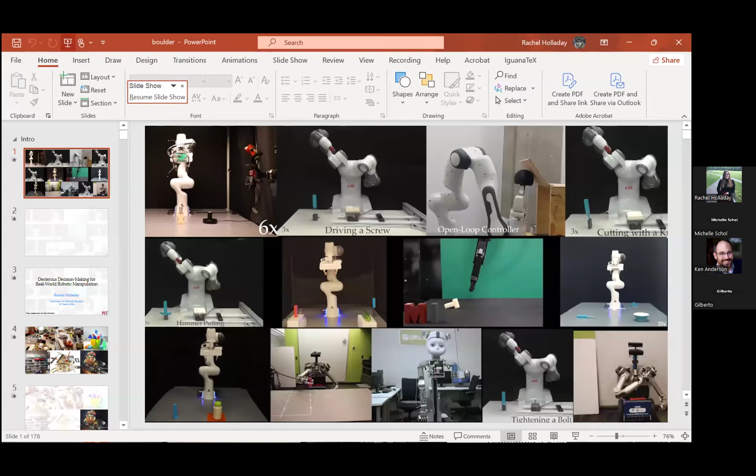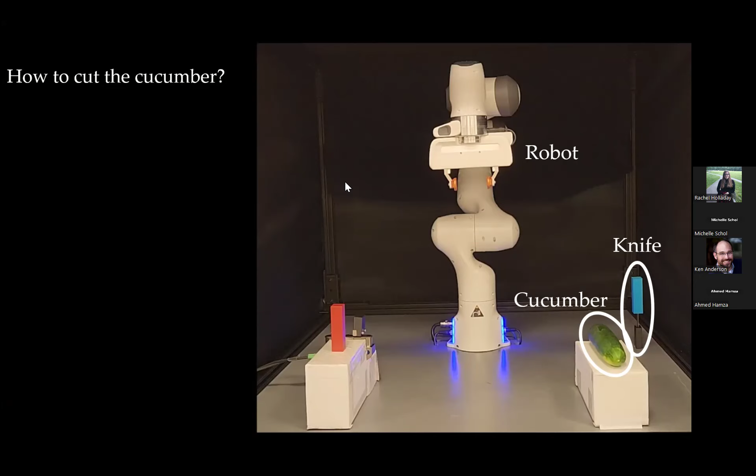So we might think about what it takes for a robot to accomplish this task. I'm going to hide my Zoom—hopefully I don't regret that. Thinking about what it takes to get a robot to accomplish this task, I'm going to frame this as: first the robot has to solve for what is the sequence of actions, or rather the game plan or strategy, that it needs to accomplish this task.

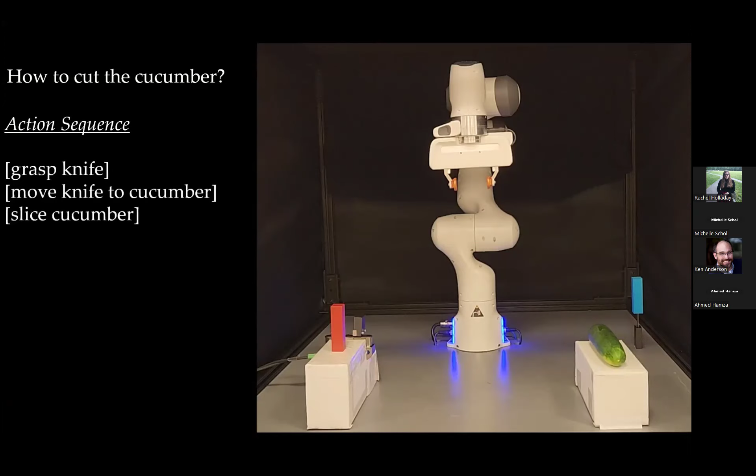If we're chopping up a cucumber, or cutting a cucumber, then a valid initial strategy might be that we'll ask the robot to grasp the knife, move the knife to the cucumber, and slice it.

Now, for the robot to actually execute this in the real world, it has to solve for the discrete and continuous action parameters for each of these actions. So for example, if we want to grasp the knife, we have to solve for how we grasp the knife in a way that we can actually reach and use to slice the cucumber.

How do we move our robot's arm to that grasp position without colliding with anything? If we're thinking about slicing a cucumber, we can think about what forces we need the robot to exert and what arm motions achieve those forces. And this is just a small subset of the things the robot needs to solve for.

As I mentioned, many of these parameters are continuous—there are a continuous number of ways you could grasp an object or trajectories that move through the world. But given this, what we can ask is: is this a viable strategy for the robot to accomplish the task? Could it find a satisfying set of parameters and actually accomplish the task in this environment?

I'm going to lead the witness slightly and say that in this case it would not succeed, because if we go to cut the cucumber, nothing is holding it in place and it's likely to roll around. Not only is that maybe a low-key dangerous, we're unlikely to succeed at the task. So in this case, I'm going to declare this a failure, and our robot needs to find a new strategy to accomplish the task, namely one that holds the cucumber in place.

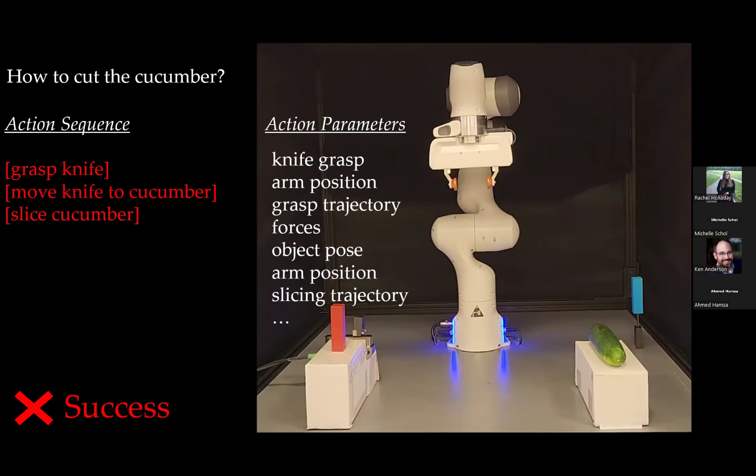This is a particularly odd kitchen where we have a vise, so we could secure the cucumber with the vise—you don't know what my kitchen is like, this could be valid. So you can imagine the robot's action sequence could now be: grasp the cucumber, place the cucumber in the vise, close the vise, then grasp the knife, move the knife to the cucumber, and slice the cucumber.

And like before, there are a lot of action parameters that we have to solve for. In addition to the ones I mentioned before, how do we grasp the cucumber? How do we move the cucumber to the vise? Where do we place the cucumber within the vise?

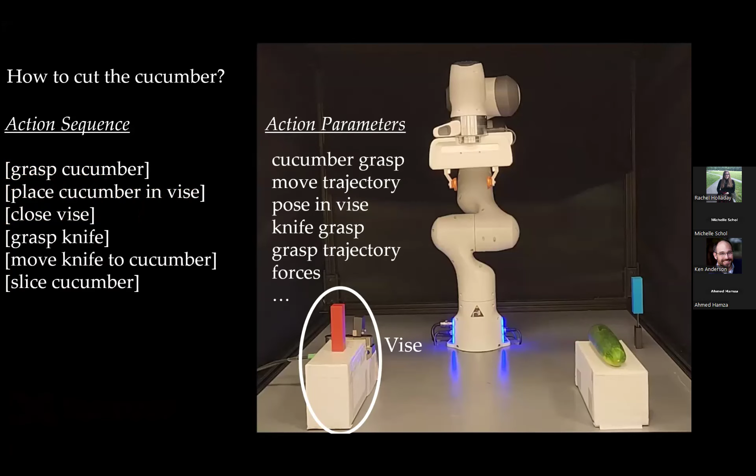But given all this in this new strategy, we can ask that same question from before: is this going to succeed in this environment? Well, there's this red object sitting on top of the vise. It's kind of taking up space and blocking the cucumber. And what this means concretely is that there does not exist a collision-free pose for the cucumber within the vise. So again, this strategy would not succeed.

So the robot has to come up with a new strategy. Let's say it now decides it's going to grasp the red block and move it anywhere, as long as it's out of the way. And once it's done that, it can continue with the strategy from before. Now, again, I ask the same question: will this succeed?

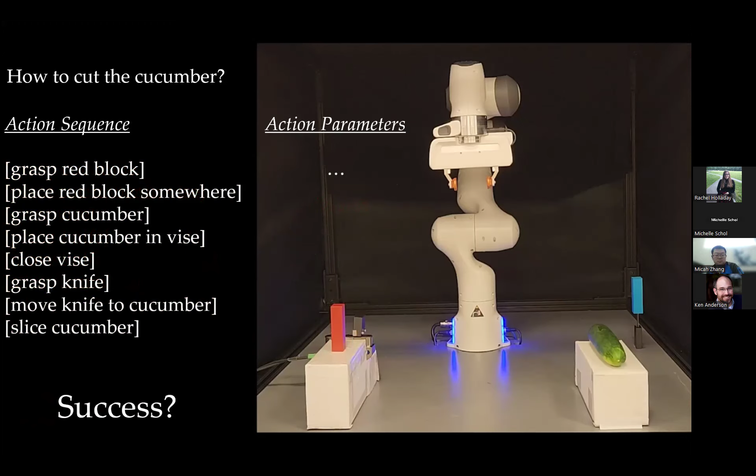As fun as this game is, I'm only going to play it for so long. So in this case, yes, the robot can plan and execute a series of motions. It's first going to move that red object out of the way. Once it's done that, it can go over and grasp the cucumber and place it within the vise.

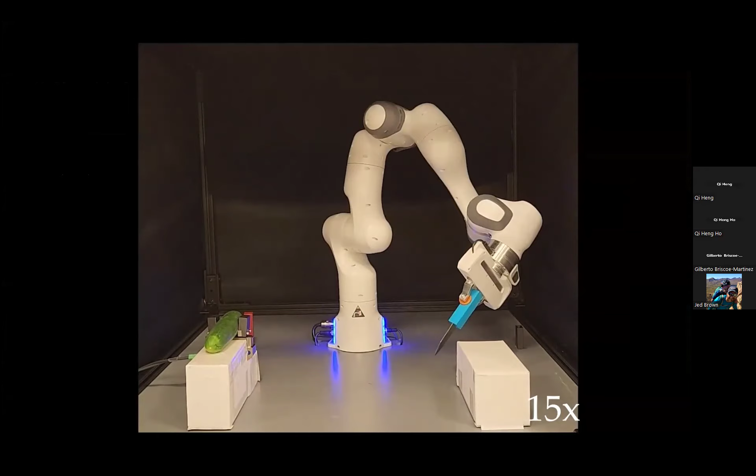Planning for the vise is part of the system, so it's the robot's responsibility. And once it's done that, it can go grasp the knife. Oh, this gets people - it is a real knife. We're not doing toys, I intend to actually cook. That sometimes scares people, but okay, given that, good job robot.

We were able to slice the cucumber. And I frame that as the robot was solving for a sequence of actions and the parameters of those actions. And those two influenced each other and were also influenced by constraints in the environment.

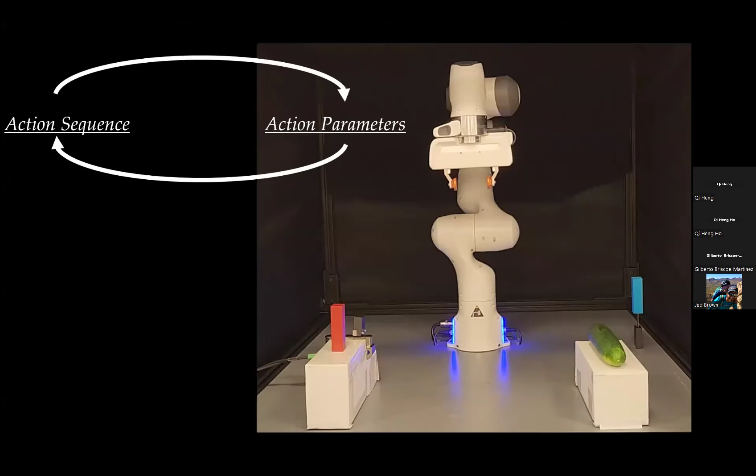Now, I'm really happy that my robot was able to solve this task in this environment. But I want my robot to be able to solve many tasks in many different environments. And so what I really want is for my robot's behavior to be able to generalize. And I would argue, in order to get to this generalization, our robot has to do some type of reasoning like we did, in the sense that it has to reason over this hybrid combinatorial decision space.

Where there are constraints based off the task and the environment. I want to tell my robot what to do, I don't want to tell it how to do it. If I had to specify to my robot exactly what it had to do in each environment, that would get pretty laborious. And in a similar vein, if we took a strategy like behavior cloning, that would struggle to aggressively generalize in the way that I want my robots to.

So because I have this motivation for generalization, the majority of this, we're going to take a model-based approach. It'll be the robot's responsibility to reason over its constraints, given models of its task and environment. Now, those models could come from engineering mechanics and be analytical, or they could be data-driven and learned. All of the above works as long as it fits within a framework that composes.

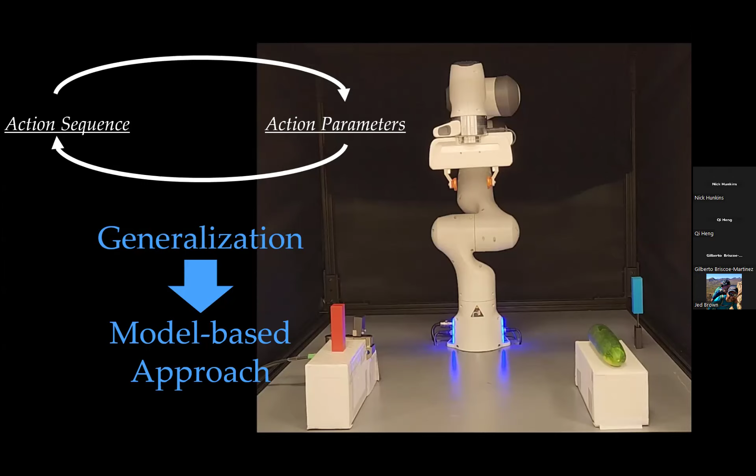Now, this idea of solving a combinatorial hybrid decision-making problem for my robot, taking a model-based approach, fits within this category of task and motion planning, or TAMP. Now, my colleagues and I wrote a survey paper a few years back, and while there's been a lot of lovely work in task and motion planning, the overwhelming majority, with one limited exception, has been focused on enabling robots to reason over constraints relating to geometry.

Let me hide this. And what I mean by that is that the robot is checking constraints like: is that motion collision free? Is that object reachable? Is that placement free? Now, this is still a very hard problem. If you have lots of objects, or you're operating on a long horizon, or you're dealing with cluttered spaces, it's still a hard problem to solve for.

We saw how that red object in the way forced us to change our plan. But I would argue that this is fundamentally limiting if the only thing we're reasoning over is geometry. This is why, if you have any familiarity with task and motion planning, you may associate it with just pick and place tasks.

If we think back to the tasks that I started the talk off with, accomplishing these tasks requires the robot to reason over constraints relating to both geometry and physics. The fact that we were exerting force through the knife forced us to relocate our object to somewhere secure. Likewise, if you had a robot rolling out dough, dynamically swinging a hammer, or packing and deforming supplies, all of these would impact the robot's decision-making. This is why my research focuses on proposing models and algorithms that enable reasoning over geometry and physics to accomplish long-horizon robot manipulation tasks.

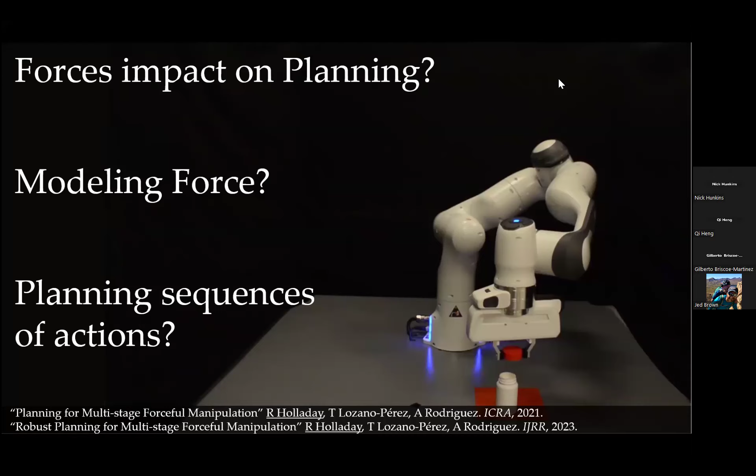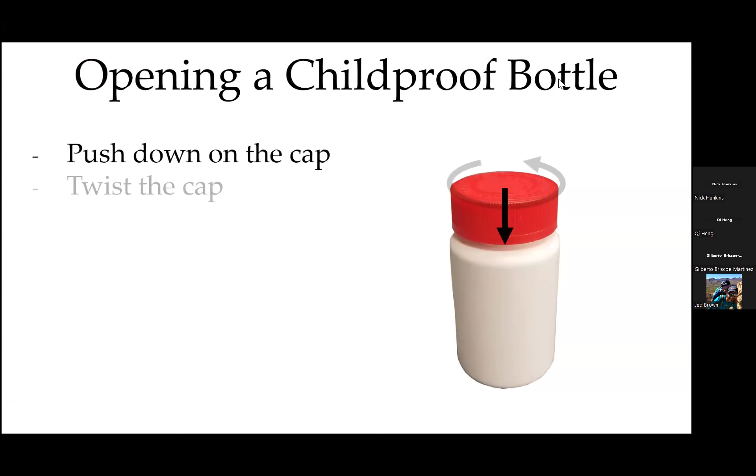The example task we'll use throughout this part of the talk is asking a robot to open a childproof push-twist medicine bottle. To open it, the robot has to both push down on the cap and twist. If we put a frame on there, we can think of it as exerting a downward force and a torque about Z.

For now, we're going to assume these quantities are given. Later on in the talk, we'll relax that assumption. Think about the robot accomplishing this task.

Here's a quick video. The robot exerts this push-twist action, and then once it's done that, it can open the cap.

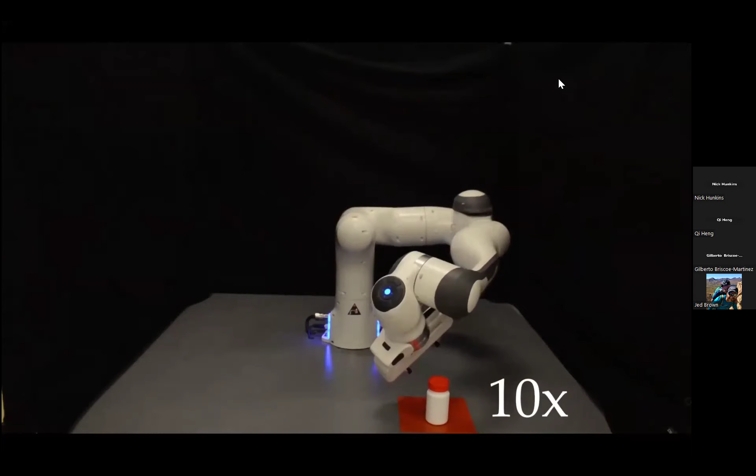I have no robot to do that for my bottle today. Sad. Okay, so the robot was exerting a force and torque while it was doing that push-twist action.

I'm going to argue that the need to exert a force and torque, or a wrench, impacts the robot's decision-making in two ways.

The first way we already saw in the cucumber cutting example: if we're exerting a force and torque on an object, we have to hold it still. For example, here, if nothing is holding the bottle still, then it's going to move with respect to the table. It actually slips, and we're not able to successfully complete the task.

The reason why that didn't happen in the first video I showed you is that the bottle is actually on a red mat that has a high friction coefficient, and this provides enough grip to hold the bottle in place. So the system, whether it be the environment, the device, or another robot, needs to hold, secure, or fixture the object in place.

The second constraint on our planning is that the robot has to be strong enough to accomplish the task. Now what do I mean by this? To answer it, we're going to do a slight technical dive.

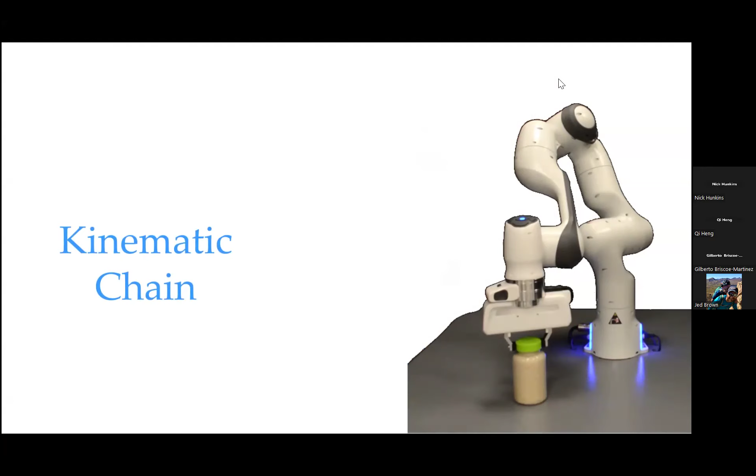I think of the entire system, the robot, the bottle, the table, as a kinematic chain composed of a series of joints. Some of those joints are robot joints, and some are what I'll call frictional joints formed via contact, for example the robot's grasp on the bottle.

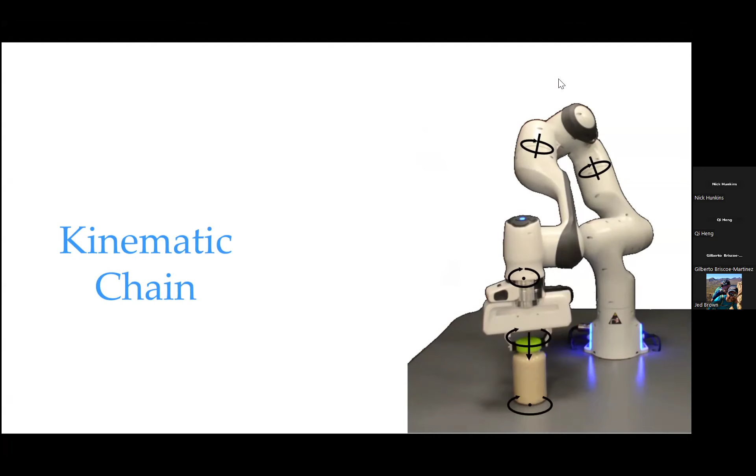The constraint that needs to be true in order for us to plan, for the robot to be strong enough, is that in the face of the exerted force and torque, each of the joints needs to be able to resist that force and torque, each needs to be able to be held or stable. So we're going to mathematically model the amount of force and torque each joint can resist, and we'll say if it can resist it, colloquially that the joint is stable.

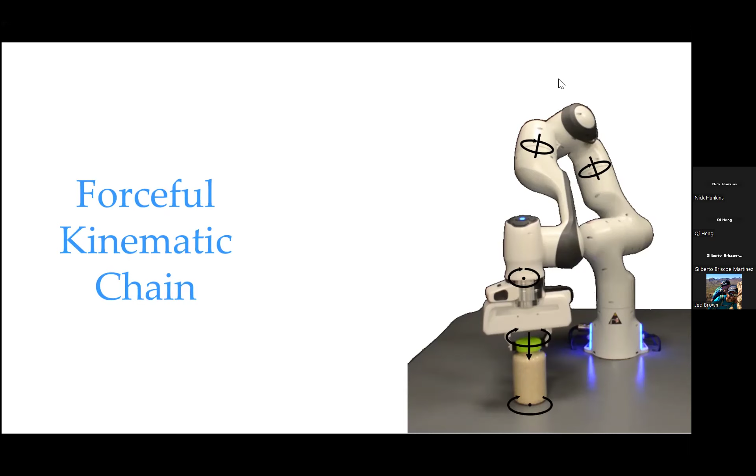And if all of our joints are stable, we'll say that our chain is stable and our constraint is satisfied. So we're going to start off with the more straightforward case, which is thinking about what does it mean for a robot joint to be strong enough?

Well, robots are limited in the amount of torque they can exert. They have torque limits. Breaking this joint would correspond to hitting a torque fault, which is a very sad noise we want to avoid. So we want to model, are we within the robot's torque limits?

So what we're going to do is take the exerted force torque wrench, rigid body transformation into the frame of the hand. And then once it's in the frame of the hand, we have to transform it into torques at the joint. Now, in order to do this transformation, we're going to use what's called the manipulator Jacobian.

So you take the forward kinematics of a robot and differentiate it with respect to time. You get the manipulator Jacobian. It maps joint velocities to end effector velocities, and beautifully, the transpose of the Jacobian, which is what we have here, maps wrenches, or force and torque, at the end effector to torques of the joint, which is exactly what we're looking for.

I'll note the manipulator Jacobian is parameterized by our joint angles, our configuration Q. And intuitively, that makes sense. If you think about your own robot arms, different configurations might allow you to resist more or less force, and our configuration dependent Jacobian is capturing that.

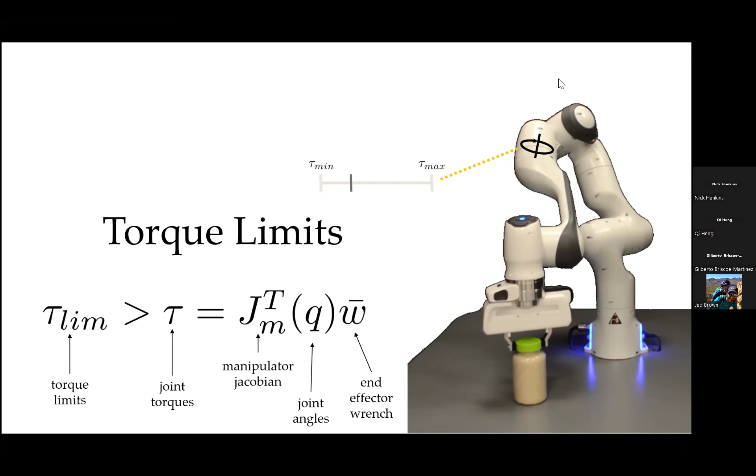So once we have transformed into torques at the joint, we can compare that to our robot's torque limits, which we assume are known. And if we're within our robot's torque limits, then our constraint is satisfied, and we can check this for all of our robot joints. So this is the more straightforward case, I'd argue.

We can also think about what does it mean for our frictional joints to be strong enough? Well, for our frictional joints to break, that means the two objects would move relative to each other. So our two frictional joints here are the robot's grasp on the bottle, as I already mentioned, and the bottle's contact with the table.

And so we saw a case where the joint between the bottle and the table broke when the bottle slid relative to the table. And so we want to express how much force and torque each of these frictional joints can resist. To model this, I'll observe that both of these joints are what's called planar joints.

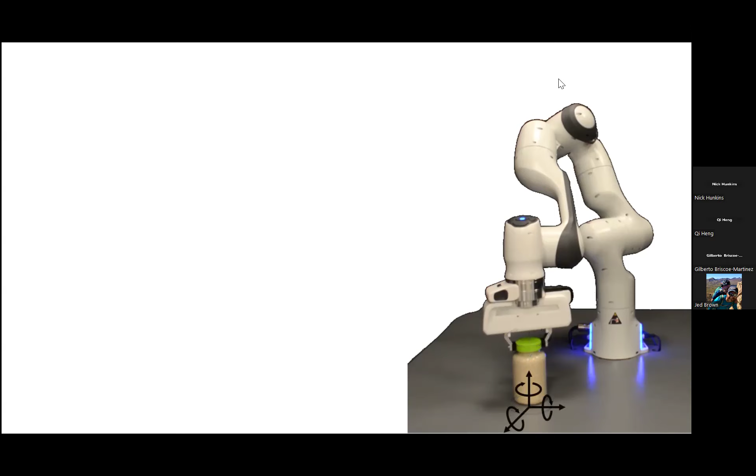And what I mean by that is if we look at, for example, the joint between the bottle and the table, in 3 dimensions, the object cannot move due to non-penetration limits. Because we are dealing with rigid bodies, the bottle cannot rotate into or go into the table.

And so we'll assume in these three directions that we can resist an infinite amount of force and torque due to non-penetration limits. In the other three dimensions, we can move, and in fact we've already seen a case where it did, and what prevents motion in these three dimensions is friction. So the question becomes, how much friction do we have for these types of joints?

Well, the amount of frictional support given by a contact is quantified by something called the limit surface. And because we're dealing with planar contact, there are two possible construction methods: the ellipsoidal approximation and the generalized friction cone. And which is appropriate depends on the type of contact that you're making.

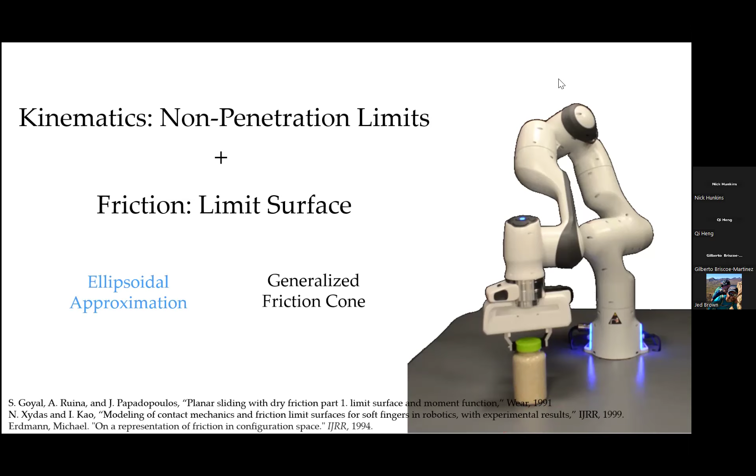Now, to understand the limit surface a little bit better, let's dive into the ellipsoidal approximation. So if you have a circular patch contact in a uniform pressure distribution, then the amount of frictional support given by a planar contact can be represented by an ellipse. And this ellipse is basically the set of frictional wrenches that this contact provides.

And so thinking about this a bit concretely, imagine this contact is experiencing an external force and torque, for example the wrench represented in green here. If that exerted wrench is within the boundary of the ellipsoid, then we can say we have enough frictional support to resist that exerted wrench, and our contact will not move. This is good for us because this means that our constraint is satisfied.

If we have an external wrench like the one given in red, where this exceeds the boundary of the ellipsoid, then we can say that our external wrench overpowers our frictional support and our objects are going to move relative to each other.

Now, how they move is actually well characterized, but we're not going to use that in this context. We're just going to say that it is bad because our constraint is broken.

This ellipse lives in 3D and it's parameterized by this matrix A. For isotropic friction, A has a few parameters: the grasping force N, the friction coefficient mu, the radius of contact R, and integration constant C. For now, we're going to assume that all of those quantities are known, but we're going to relax that assumption later on in the talk.

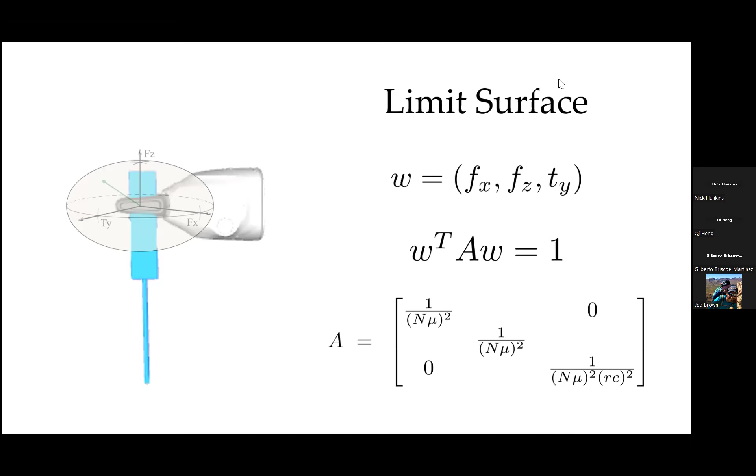Summarizing this, to evaluate a constraint with respect to the limit surface, do a rigid body transformation into the frame of the hand, and then evaluate whether that wrench falls within the boundary of the ellipsoid. And because different grasps lead to different rigid body transformations, one grasp may be stable when another is not.

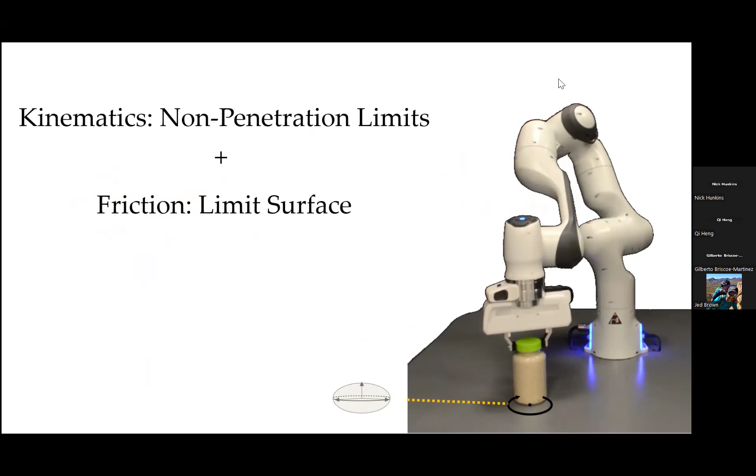And so in evaluating our planar joints, our frictional joints due to contact, we're going to use a combination of kinematics and friction. Bringing this all together, for each of our different joint types, we have a way of evaluating if the constraint is satisfied, if our joint is strong enough.

And you might have guessed, because we saw it before, that here our frictional joint between the bottle and the table is not satisfied. We can see that our models reflect that, in fact, that the exerted wrench exceeds the boundary of the limit surface.

In this case, what we'd want our robot to do is to find a new strategy that constructs a new kinematic chain with a different series of joints that are stable. Here, by using a high friction surface, that actually expands the boundary of the ellipse, and now we're stable.

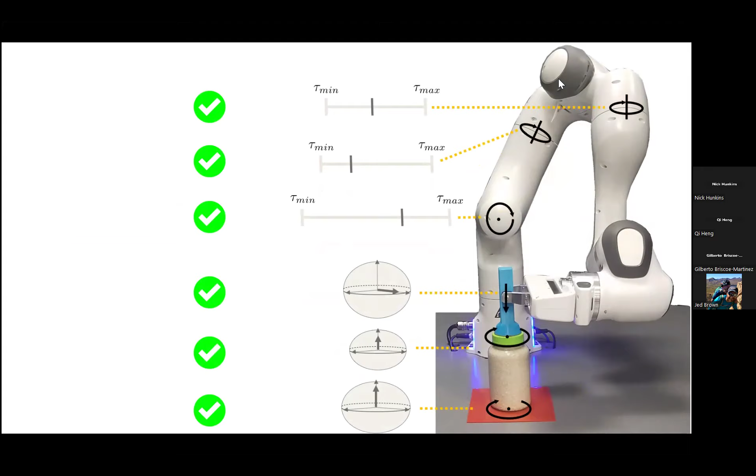Summarizing from this, we define what are the constraints that impact our robot's decision-making as a result of needing to exert force, and then we capture that within our forceful kinematic chain model. While I talked through a couple different joint types and a couple of different models, you can imagine swapping in different models and joint types. For example, there is a 6D version of the limit surface if you are so inclined.

Questions about this so far?

Why don't you press down? Is that also an option? The downward force, or are you looking just at the torques? Force and torque. So it's the downward force and the torque. And you couldn't press hard enough? Not in this case—the robot would not be strong enough to press down because, and this is a very specific answer, we're using Cartesian impedance control. For that robot, you cannot exert more than 20 newtons that way, and it would not be enough to make it stable. Okay, although it does sample for that to check.

Yes, if you have a strong enough robot, you can just power it through. Although we're not modeling whether you crack the bottle in half, which would maybe start to be a constraint. Great, other questions? Okay, we'll keep going.

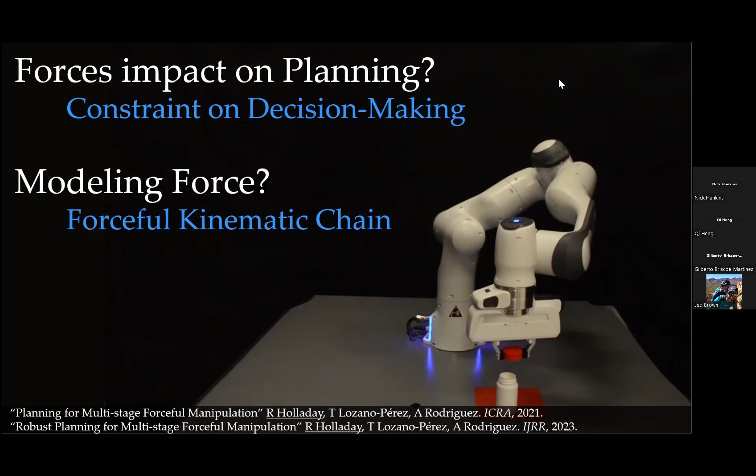So now let's think about how we can integrate this within the context of planning. To do that, I'm going to make concrete some of the things that I started the talk off with. The first of which is that I've been talking about planning sequences of actions. I didn't define what I meant by actions, and all of you were very polite—no one called me out on it, but I would like to define that now.

So when I say action, what I mean is a parameterized controller. We have some controller that we're executing on the robot, and it has parameters. For example, you can imagine we have a place action parameterized by things like the initial robot configuration, the placement pose, and the grasp. In this case, it runs a combination of a joint space controller and a grasp controller.

Now, given our controller, we're going to characterize our action by two things: preconditions and effects. Preconditions are the requirements, or what needs to be true about the state of the world, in order to execute your controller. For example, we might imagine a precondition to your place action is that wherever you're placing has to be available, has to be collision free.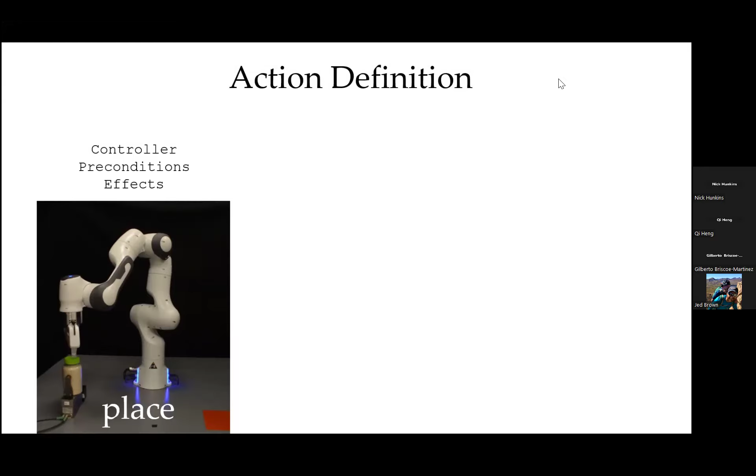And then we have effects, which are the resulting changes to the world as a result of running your controller. For example, an effect of executing the place action is that we're no longer grasping the object. This is given in PDDL, which is Planning Domain Description Language. Now, this is one action—we can imagine defining a whole set of actions.

Here's the move action, and here's one of the push twist actions. I want to call special attention to the push twist action because it exerts a force and a torque. So a precondition to executing this action is that the forceful kinematic chain constraint has to be satisfied throughout this action. That is how the constraint is integrated in: for any action that exerts force, the forceful kinematic chain constraint has to be satisfied as given in the precondition.

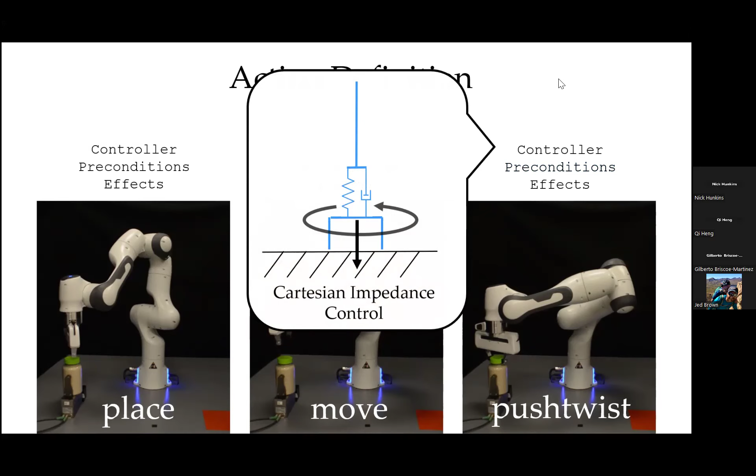I'll also note, although I already spoiled this, that in order to exert force we're going to use a Cartesian impedance control. I'm happy to talk about this more at length. But given this set of actions, returning to the beginning of the talk, our planning problem is that we need to solve for a sequence of actions and the parameters of those actions, subject to constraints. Those constraints relate to both force and motion and are encoded in our actions' preconditions and effects.

The way we're going to solve this, as I've kind of hinted throughout, is that we're going to use a task and motion planning framework. Specifically, I'm going to talk through the one that we use. It's state of the art, and I think it also gives a good example for how these types of problems are solved in general. It's called PDDLStream. So in order to use this framework, you have to specify a series of what's called streams. That is where the name comes from.

Streams are just functions, and they can serve two roles. First, they can generate possible instantiations of your action parameters. Because many of our parameters are continuous, you can think of these as samplers. For example, you could have a function that, given an object, samples possible grasps or possible forces. You can also have streams that sample more complex things, like ones that sample possible trajectories using collision-free motion planners, or a stream that samples possible impedance parameters.

In addition to generating possible instantiations of our action parameters, streams can also evaluate constraints on your parameters. For example, we have streams that check our forceful kinematic chain constraint, and streams that check whether a trajectory is collision free. These are functions, and within them you implement them however you like—you can use analytical models, learned models, or a combination of it all.

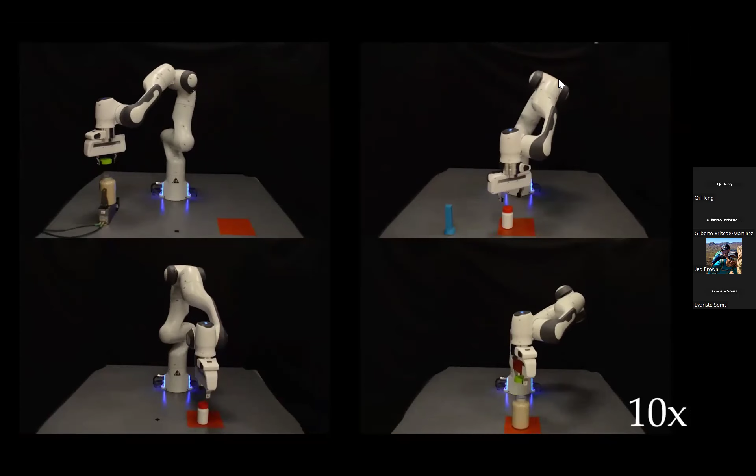Here we have different bottles with different force requirements, different objects, different locations. In each case, the planner is solving for, given this environment, what strategy can I use to solve the task? Sometimes it uses a vice, sometimes a tool, sometimes it has to relocate an object to a higher friction area because there's no vice or second robot on the scene, and sometimes it uses the robot's palm. To me, this is critical: my robot has to do this kind of decision-making in order to generalize to many different environments, reasoning about how to solve the task for that particular environment.

In addition to these tasks, we also deploy this in the context of twisting a nut on a bolt. I'll apologize, this is my only non-real robot video, because we did not have a 2-arm setup, but I want to highlight that this framework can handle this type of uncoordinated bimanual manipulation just as easily.

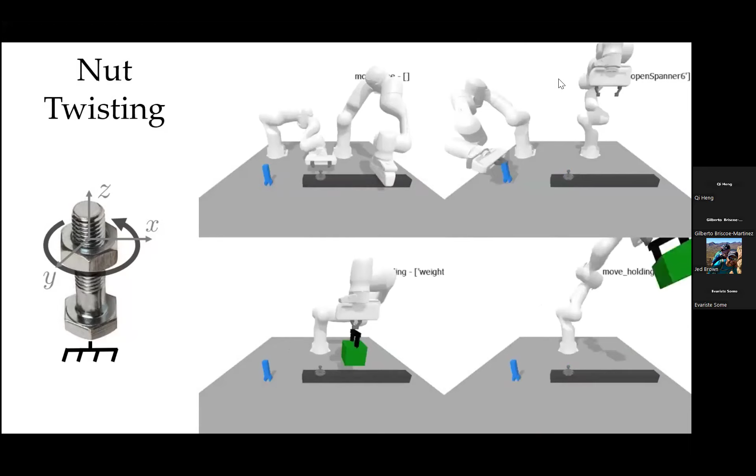So here we saw how we integrated those force constraints into the state-of-the-art task and motion planning frameworks. Are there any questions about this so far?

Does this framework is this framework limited to equipment, and how do you think you can address this problem if it is? Equipment in terms of specific to the embodiment of the robot? Yeah, like you said, some of them need 2 robot hands. Or maybe the movement of the robot hand is limited or something like that.

So it's not limited to different hardware. In fact, the last video I'll show at the end, we do consider a different robot hand, so that's not a limitation. It does require that you know what your robot hardware is, so that your planners have a notion of what your robot's capability is. But it's not inherently limited to different types of robots.

I have 2 questions that are sort of related. First, does PDDLStream do any sort of optimization? Does it see if—yes, if you wait 10 minutes, we will get there, because there is a notion of cost that we can handle. The second question is related: can you form an algebra from these actions, or is it just too complicated to do that?

That is a fascinating question. I do not know off the top of my head. It's not inherently clear that you could, because I don't think you could even adopt any of the proofs you might have from task planning, since now you have continuous elements that I assume would make everything ungodly messy. Do you at least know if there's commutativity—can you always do one action for the other, or the other way around? Does it work, or does that break down? I suspect that might be dependent on what your action set is, but I'd be hesitant to say it is, because the continuous elements might make things particularly messy and your constraints might not be universally satisfied. Apologies, I know this is an unsatisfying answer.

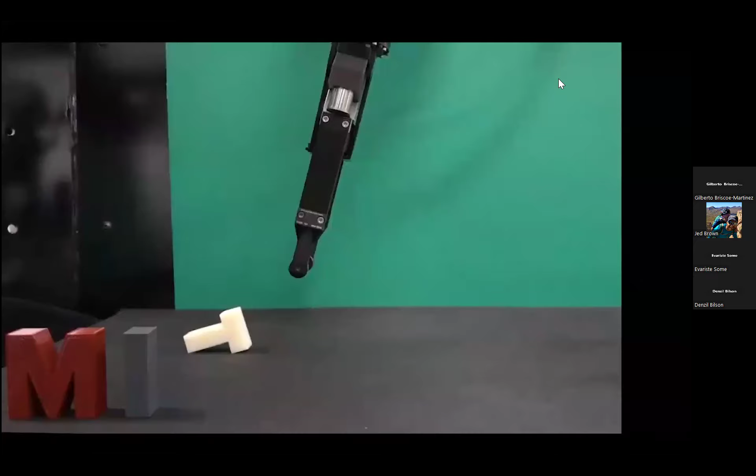So here I want to place this T-shaped object, and the set of initially available grasps, because of the environment, does not intersect with the set of grasps that allow me to accomplish the task.

Now, this is a somewhat contrived example, but I would argue the idea that you might have to change your grasp on an object comes up a lot. You can imagine if you're pulling a screwdriver out from a crowded tool bin, you might pull it out by the tip and then change to grasp the handle before you screw something.

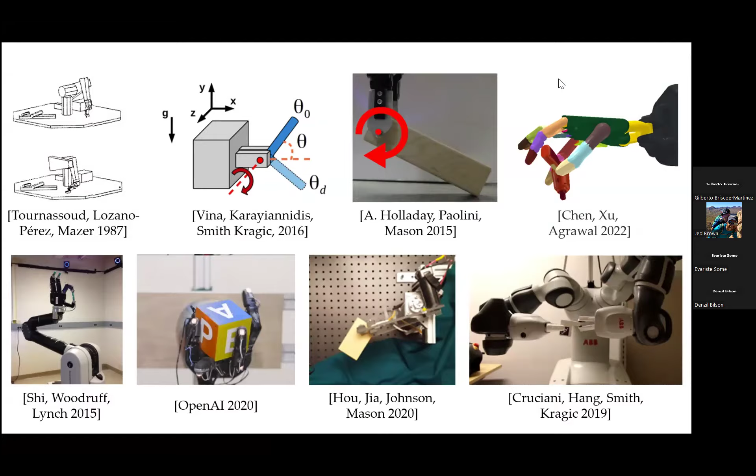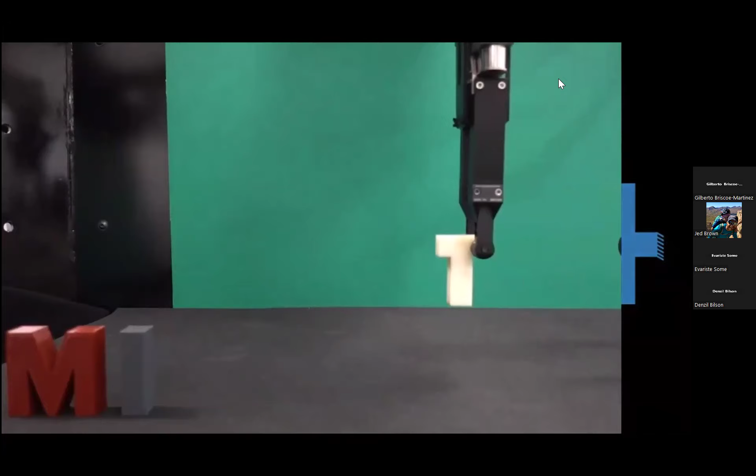The idea of robots needing to re-grasp or change their grasp on an object has come up a lot within robotics. There's a lot of really beautiful work. Today, I want to look at one particular way a robot could change its grasp on an object, and that is by enabling a robot to leverage its environment, specifically by pushing against features in the world. By planning a sequence of pushes, it can change how it's grasping an object, in this case, to spell out some funny words.

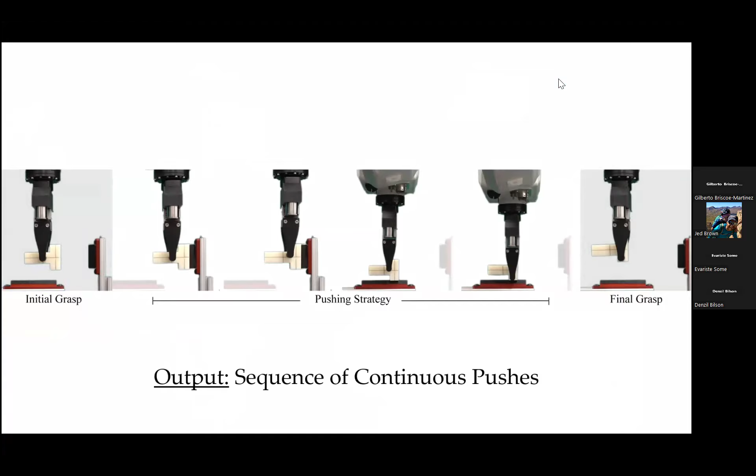So the planning problem it needs to solve is that given an initial grasp and a final grasp, and locations in the world where it can push against, the robot needs to solve for where and how to push in order to move from our initial grasp to our final grasp. The core constraint we need to solve for is, given a specific pusher, what is the set of motions that I can achieve?

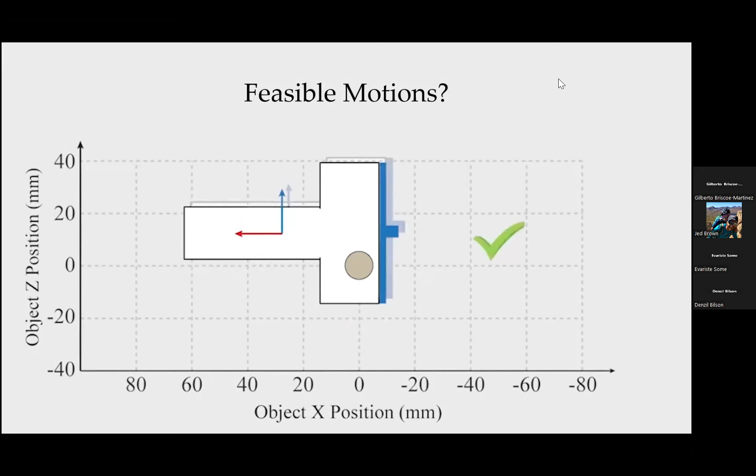Because pushing is underactuated, for a given pusher, there may be some motions that you can't achieve and some motions that you can. So what we want to characterize is, for a given pusher in the world, what is the set of motions that are possible?

Now, in 1986, my academic grandfather, Matthew Mason, defined the motion cone as the set of feasible motions that a rigid body can follow under the action of a frictional push. Great, this is exactly what I said we wanted. Did my grandfather cover it?

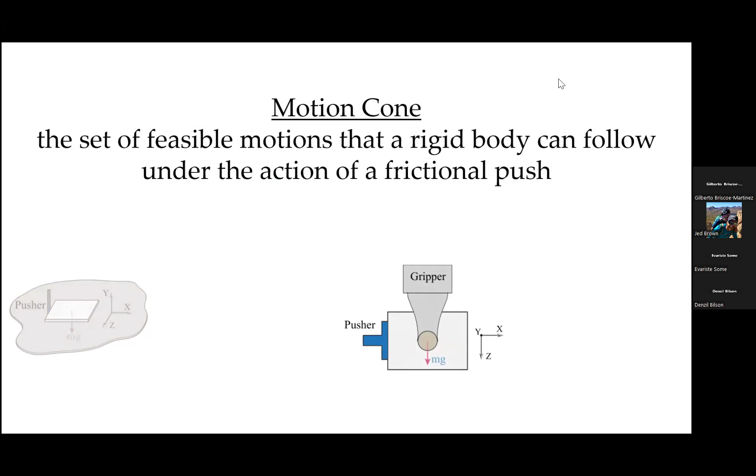Well, the motion cone was originally defined in the context of what's called horizontal pushing—you can imagine pushing an object on a table. But the video I showed, we were handling pushing in what's called the vertical plane, where what was supporting the object was not a table, but the robot's grasp. In addition to the force of the pusher, we also have the force due to gravity. The contribution of this line of work was to extend the notion and construction of the motion cone to consider a broader set of planar environments with different support surfaces and different forces acting on the object.

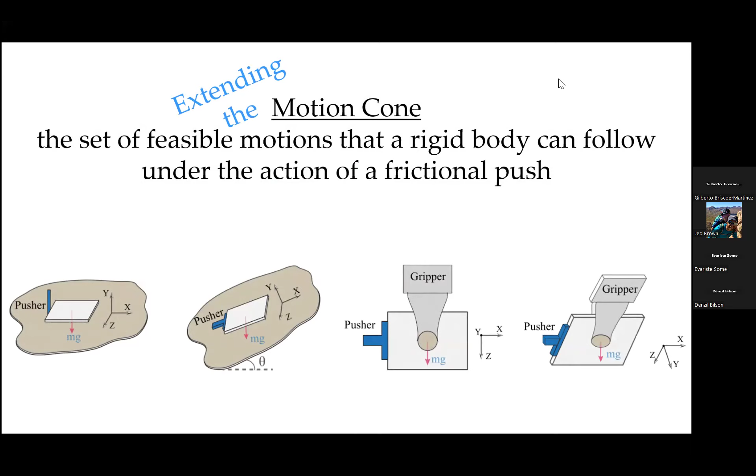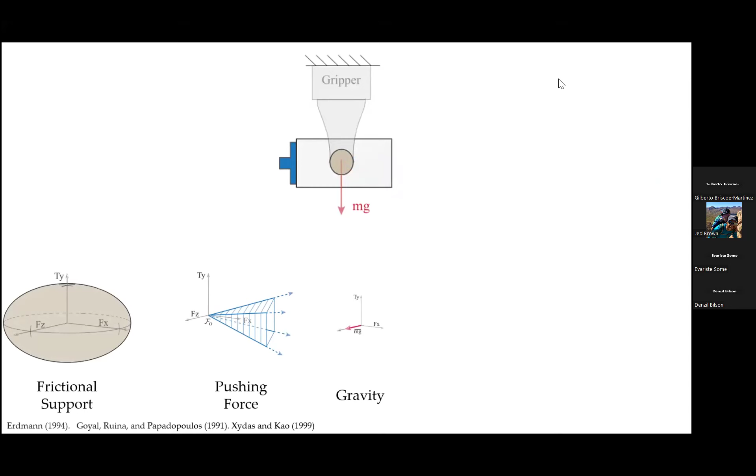Going over it very quickly, essentially we model what are the forces acting on the object. These are some of our old friends we've seen before, our limit surface, our generalized friction cone. We then combine and resolve these forces to get the set of possible forces, and then from that, the set of possible motions. That set of possible motions is our motion cone.

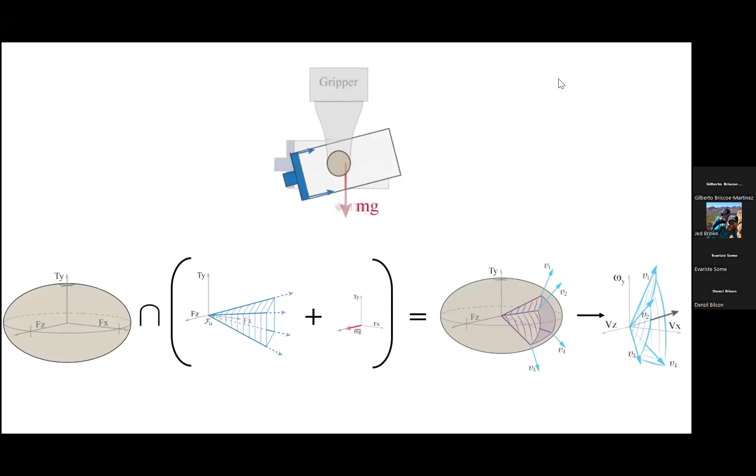So motion within this cone corresponds to a motion that we can achieve using our pusher. I won't get into the details, but we experimentally verified that this holds in practice with thousands and thousands of pushes in an instrumented setup.

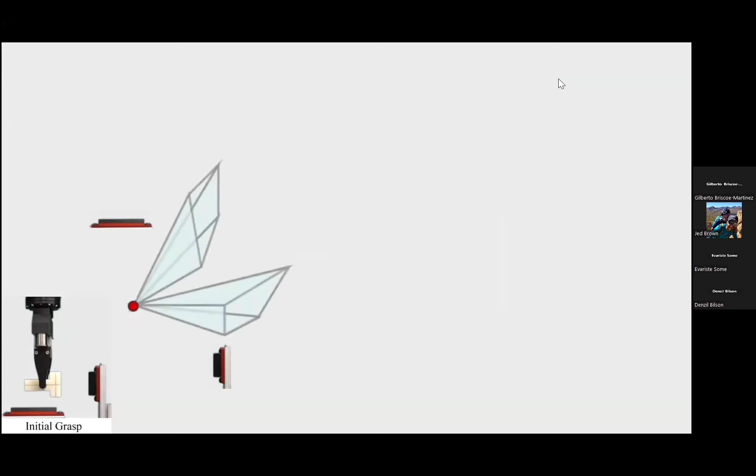But if we return back to our planning problem, what we can now say is that, given an initial grasp, if we have a set of pushers in the world, through our motion cone, each pusher defines a set of feasible motions. What we can basically do is explore our space by forward chaining these cones.

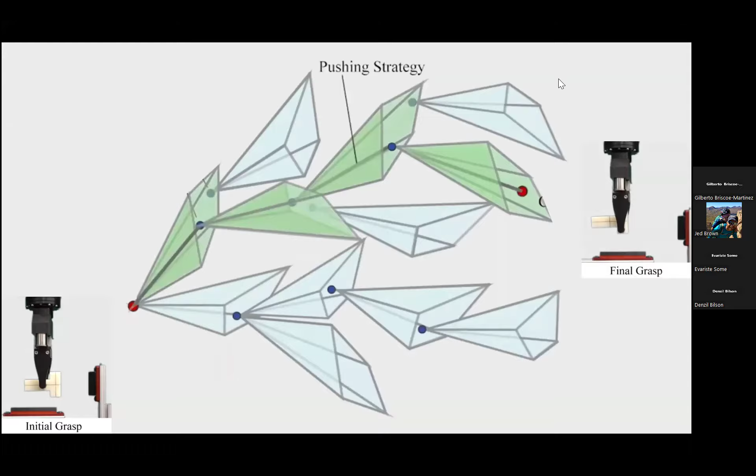We've taken all the difficulties and underactuation of friction in physics and captured it within this closed form set. Here we're using specifically a sample-based motion planner called RRT star. We can use it to find a sequence of pushes that move us from a start grasp to a final grasp. Now, return back to our video.

Here we can see that first the robot pushes just directly to the side. But if I now swap out for slippier fingers, the robot plans to first push down to account for the fact that as it pushes to the side, gravity is going to cause it to slip.

I'm putting the planning times in the corner here, and we're able to plan these sequences in fractions of a second. This is in contrast to a previous method that had to solve a complex inverse dynamics problem and took several seconds or even longer. We are able to handle non-convex objects, although we do assume that we know the object shape.

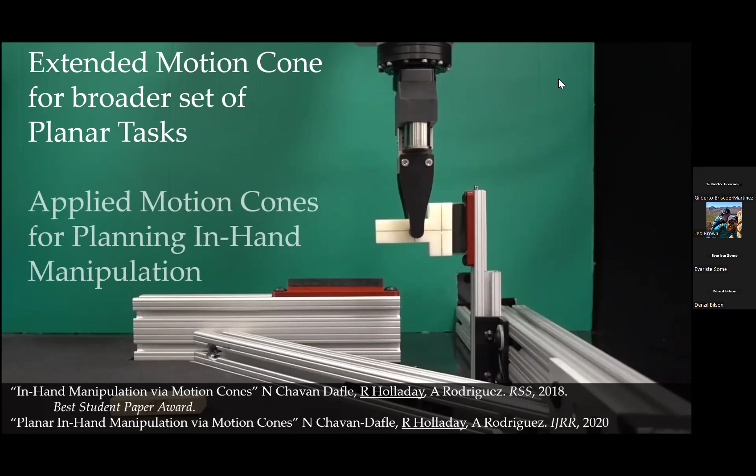So summarizing from this, we extended this fundamental notion of manipulation, the motion cone, to a broader set of planar tasks. The motion cone gives us a mapping of, given a pusher, a set of reachable motions, and we integrated this mapping into a sample-based motion planning framework in order to handle in-hand manipulation. If we think back to our stream conversation, this planner is yet another subplanner within our broader framework, expanding our robot's dexterity.

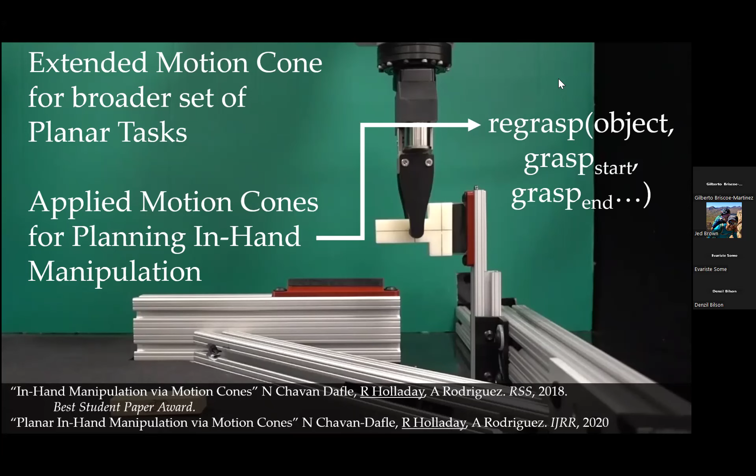So summarizing from this, we saw how we can model the impact of forces in planning and integrate that into our planning frameworks, both at the task and motion planning level. Throughout this, our robot has been solving for a variety of different constraints, and I want to think about how I can ask my robot to handle those constraints while balancing the fact that I want it to be robust in the face of uncertainty. This is also going to let us relax some of the assumptions I've highlighted throughout the talk.

In order to look at this, we're going to return to our cutting example. While there are a continuous number of ways to grasp the knife, for example's sake we're going to consider 3 possible grasps on the knife.

Given all of the modeling we just walked through, if we had a particular object that required a certain amount of force, we could evaluate if each of these grasps are suitable, if they're stable. You might think that if we have an object requiring a low amount of force, like a peeled banana, that each of these grasps are sufficient. And in fact they are - we're able to cut through the peeled banana using all 3.

But if we take an object that requires slightly more force, like an unpeeled banana, then the grasp that was only barely stable before - there's a lot of variation in bananas, let me tell you - might not succeed. The middle grasp can still cut through the banana, and the grasp on the far side, it's easy peasy banana squeeze. But if we take an object requiring even more force, like our friend the cucumber, these 2 grasps are not able to cut through it, but the grasp on the far side is able to. If you remember the very first video I showed you, this might have been a hint of what was to come.

Now, for each of these food and grasp combinations, I'm showing you 1 video, but for each condition we repeated this 10 to 15 times. On a personal level it was a really weird week for me - not to brag, but I've had multiple meals in a row prepared by a robot, just not one a doctor would approve of. So I have to keep going in my research.

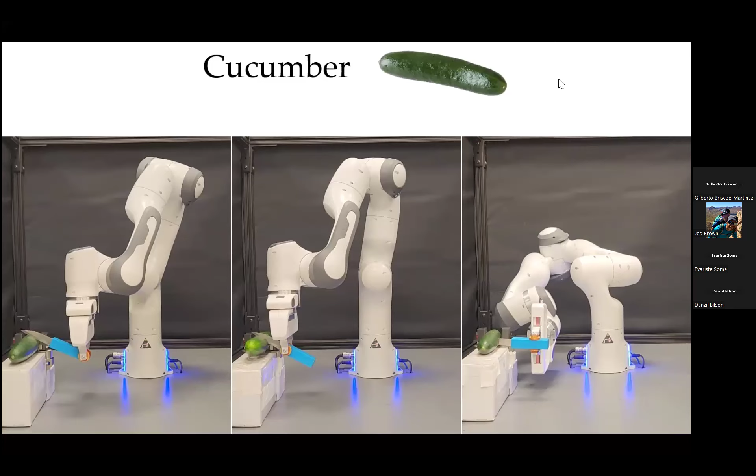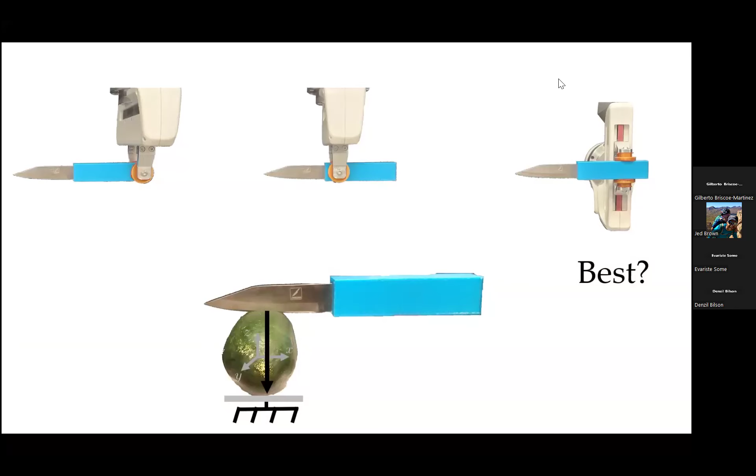But if you watched all the dozens and dozens of videos, and not me eating in the corner, you might conclude that this grasp on the far side is doing quite well, able to cut through the most number of objects. You might say this is the best grasp, we should just go with this one. And on a more fundamental level, if this is the best grasp, then what are we doing all this sampling and searching for? Shouldn't we just commit to this one? Not so fast - there's not one grasp to rule them all.

First, because we're considering what is the strongest grasp for just the downward motion of the cutting action specifically. But to that more fundamental point, we have to deal with constraints related to both physics and geometry. So being strong enough isn't sufficient.

And if you look at this grasp, because of the geometry of the hand, it's the Franka Emika hand, if anyone's familiar with it, it's quite fat. And you're only able to use this grasp without running into the table if your objects are elevated. That's why everything I've cut so far is on elevated cutting boards. Yes, I'm calling those cutting boards.

So you might imagine that in certain cases, depending on what you want to cut, you may want to make the trade-off of using this middle grasp that is strong enough, but maybe can get into a wider set of confined spaces. On the other hand, if you truly need to cut something that requires a lot of force, the robot would then need to plan a sequence of actions that relocates the object to an area where you do have enough clearance to use this stronger grasp.

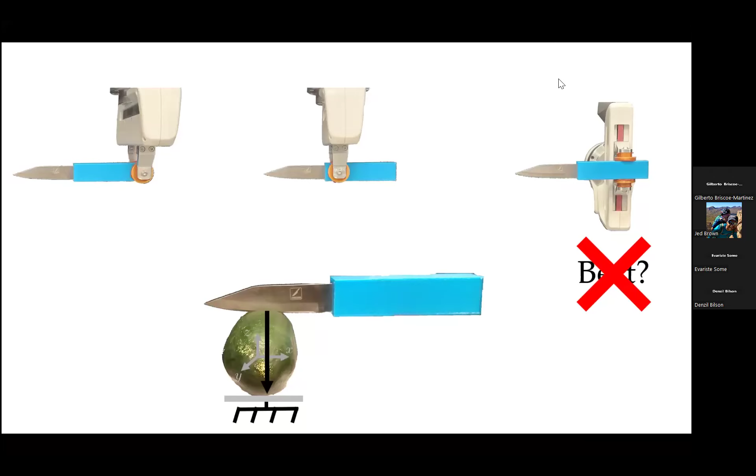And so I want my robots to be able to make these trade-offs, to think about how you can balance constraints while also being robust. And the way we're going to do that is we're going to frame robustness as a cost. This goes back to the optimization question.

So I'm going to take our forceful kinematic chain models, and for each of the physical parameters, I'm going to perturb them slightly - this is the amount of force that's required, the grasping area, the friction coefficient. We're going to perturb them. You can think of this as capturing a bounded amount of uncertainty. And across all of these perturbations, I'm going to count how many of them lead to the forceful kinematic chain constraint being satisfied, giving us a probability of stability given perturbations in our physical parameters.

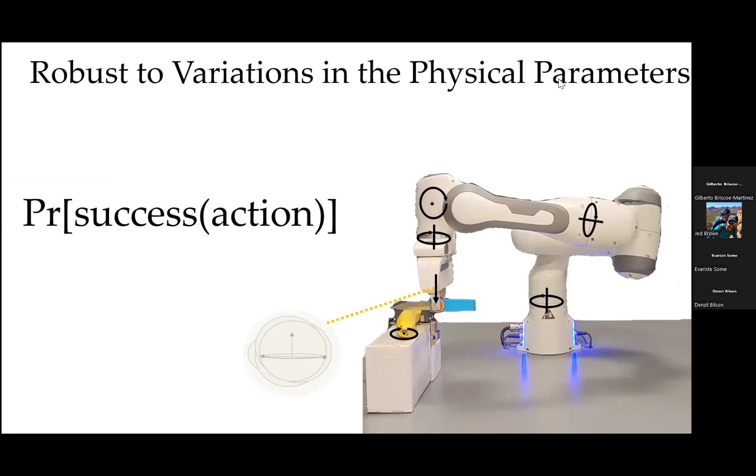And if I take the negative log of this, then minimizing this corresponds to maximizing plan success likelihood. What I can say is I can assign this notion of robustness as the cost of my action.

Within a framework like PDDLStream, we can use additive action costs, where the cost of a plan is the sum of the cost of an action. And then we can ask our planner to find a plan that is within some cost threshold. So you can think of this as being like how robust we want the plan to be.

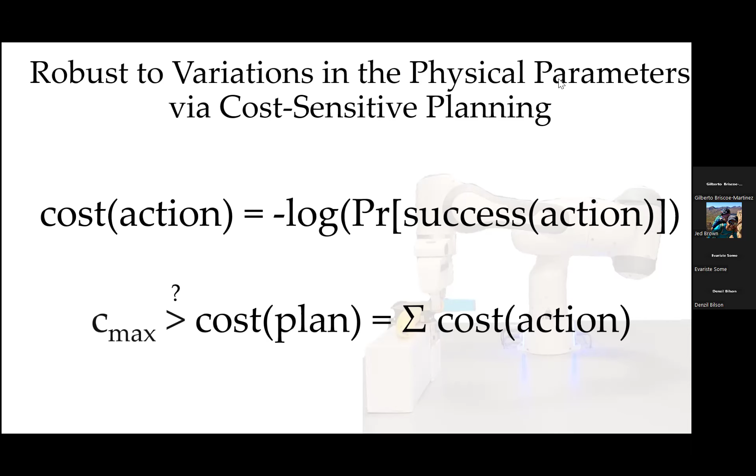So this is optimizing for a very specific thing, this notion of wanting to optimize for robustness. You can imagine optimizing for other quantities. But why I like this is that now it enables the robot to both balance all of those hard constraints while optimizing for what is the most robust choice in the given environment.

So again, I don't want to specify to my robot what it has to do. I want it to be able to do that reasoning. Now here we're talking about robustness as a way to handle uncertainty. It's certainly not the only way to handle uncertainty, and we'll get back to that idea in a few slides.

Questions about robustness so far?

Okay, so summarizing from this, here we thought about how we can enable robots to reason over geometry and physics for these long horizon manipulation tasks. And we specifically looked at reasoning over force and enabling robots to make robust decisions in the face of uncertainty.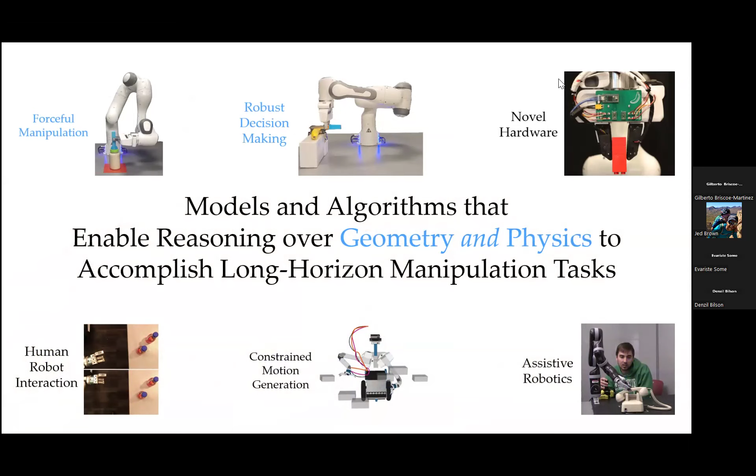To me, I think this sets the stage for the foundations of the work I want my group to look at in the future. And specifically, I want to talk through a couple directions that I think are necessary to push the field forward.

How are we doing on time?

Great. Okay, so I'm going to talk through a couple specific directions and throughout that raise research questions.

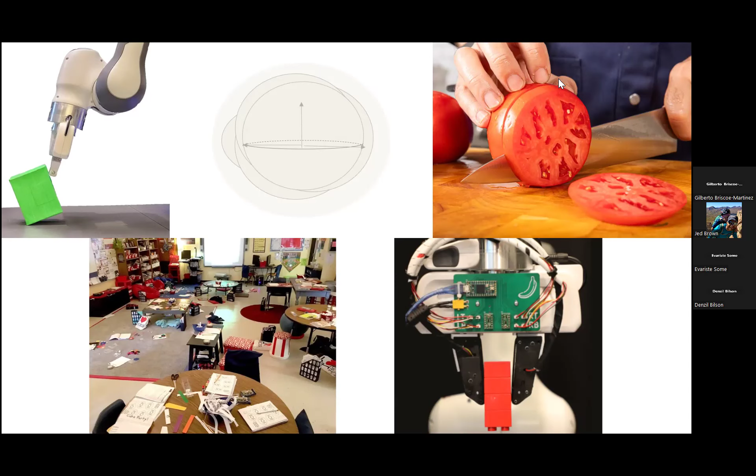So the first of which is that I've said we're going to take a model-based approach, and the question always becomes, where do the models come from? So far in the things that I've shown you, either the models already existed or part of the contribution was writing down the model. But there are cases where I think that is a less reasonable assumption.

So if we think about dynamic actions, moving out of quasi-static land, modeling dynamic actions is harder to do efficiently. If we think about objects that have weird levels of deformation, like cardboard, or my favorite example, which is opening a key ring or pulling it open, or even scrubbing a pot and knowing how much force you need in order to get it clean, I think here it's less reasonable to think that we're going to have analytical models.

I don't think it's necessary, and to me this is a great example for when you would want to incorporate learned models. I don't think it's necessary that our learned models need to capture all of the dynamics of the world. The only question is, what do we need to capture that is sufficient for robust decision making? Leveraging learned models is an attractive way of combining planning and learning, because you can use learning to capture the difficult dynamics of the world while still getting the generalization and flexibility of the planning framework.

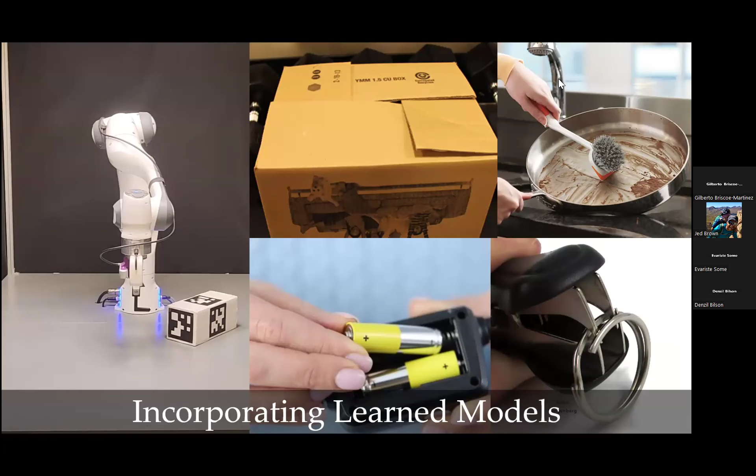Alongside models, I introduced robust planning as one way to handle uncertainty, and we were really dealing with epistemic uncertainty in our action parameters. But as you have more complex models, what robust planning looks like has to change. I want to imbue my robots with the ability to handle uncertainty in different ways—sometimes that'll look like robust planning, but sometimes it'll look like taking cautious actions, doing information gathering actions, or planning in belief space.

I think one critical way to handle uncertainty is to integrate in more reactivity. For all the videos I've shown you thus far, the individual actions were closed loop—that's very important—but the overall action execution was open loop. If a nefarious human ran in the middle and knocked something out of the way, we wouldn't be able to handle that.

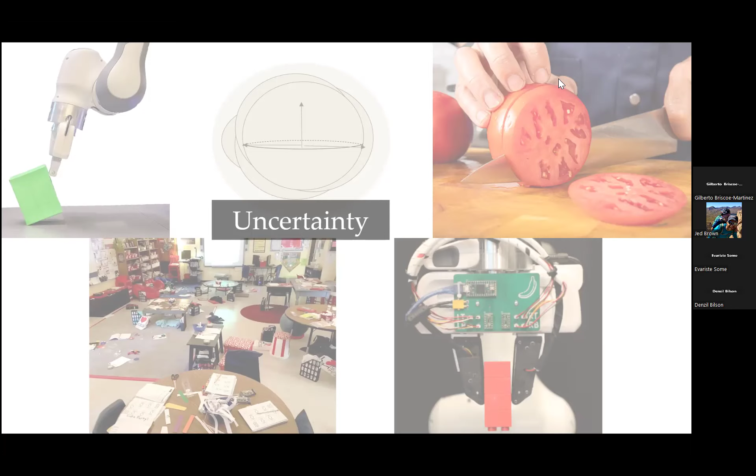I think integrating reactivity is an important way of handling uncertainty, and I'm going to show that in the context of a simple example of some work we've started on. Here the robot is cleaning up after itself, a rare thing, and it's going to be putting the silverware back. The difficult part of this task is actually opening and closing the cabinet, because we do not know how much force is required. In this case, the cabinet was fairly light and things were going as expected.

But if we now consider a heavier cabinet, the robot is going to incrementally exert more and more force. Once it realizes from its configuration that it can't exert the necessary force, it's going to replan—admittedly very naively, from scratch—on how it can open the cabinet. Now it's updated its estimate of how much force is required. So this is a very initial step of how to handle uncertainty with reactivity.

I think there are a lot of deeper questions here about where we need to be reactive and at what level, and also how to integrate reactivity with other ways to handle uncertainty, like robust planning and information gathering actions. Now, if we think about where models come from in dealing with uncertainty, I think a domain in which both of those come up a lot is the idea of plastic deformation.

Given that I said I want my robots to cook dinner, it might not be a surprise that I want my robots to do cutting. In fact, cutting has been an illustrated example throughout this entire talk, but I think we really only scratched the surface of the cucumber. In addition to there being a lot of practical applications, I think plastic deformation raises a lot of interesting deep research questions. I'm going to illustrate a few of them.

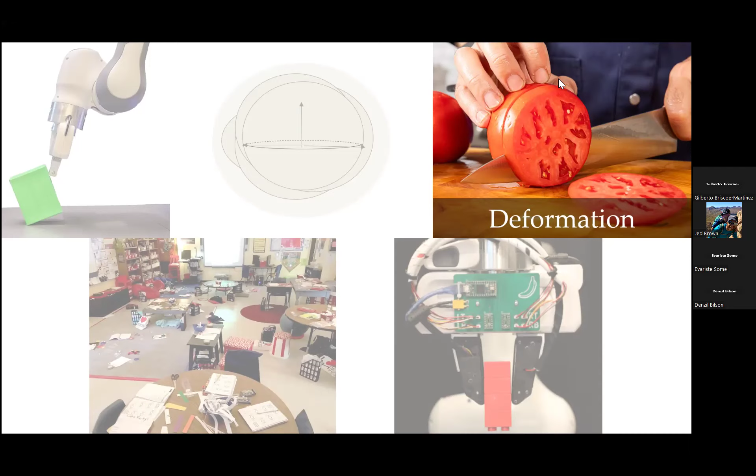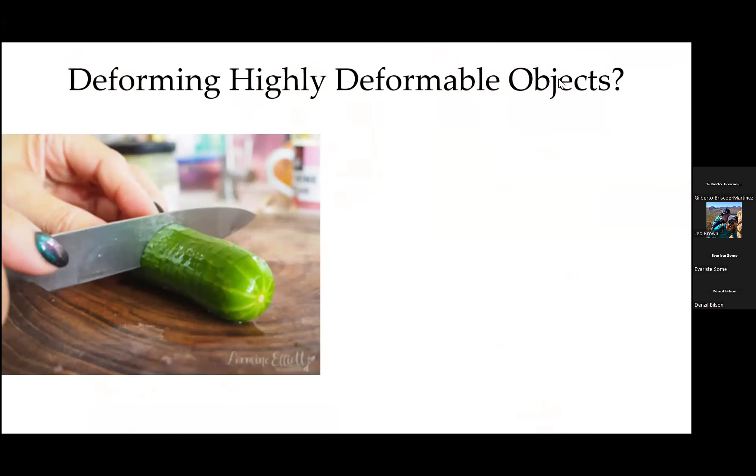One is that in all of the cutting we've done so far, you may or may not have noticed that we're approximating the objects as rigid, and we're not dealing with objects that deform. In contrast, if you're dealing with a tomato, as you operate on it, it's going to squish and move—there are questions of how do we continue to act on that. In addition, we were not dealing with the fact that objects were heterogeneous, but for a lot of objects, dealing with that heterogeneity is critical.

Going back to a point I made with respect to models, I don't think it's critical that we exactly model how a tomato deforms—I think the question is what do we need to model in order to enable decision making? Furthermore, I said I want my robots to cut vegetables, and then I showed it doing exactly one slice, and the video stopped. That's not how anyone does cooking. For a lot of these actions, it's a series of repeated motions, and I think there are questions of not only how do we integrate those feedback loops and do them reactively, but I don't think we want to plan slice 1, slice 2, slice 3.

I think we want to be able to plan actions in bulk. For that, we can take inspiration from generalized planning in the task planning community, and multi-query planning from the motion planning community.

Additionally, if we're doing plastic deformation, we as roboticists really love to factor the world in terms of objects. But as we operate on these, it goes from an object to half an object to pieces to smaller pieces to granular media. To what extent do we need to capture those state changes, and how can we continue to manipulate an object as it becomes less and less an object?

Well, I've been saying cutting. I hope you get the sense that I'm interested in cutting in the general sense. So how can I enable my robot to peel, slice, dice, chop, pare, all of those kinds of verbs? And how do I imbue my robot with this kind of rich action space?

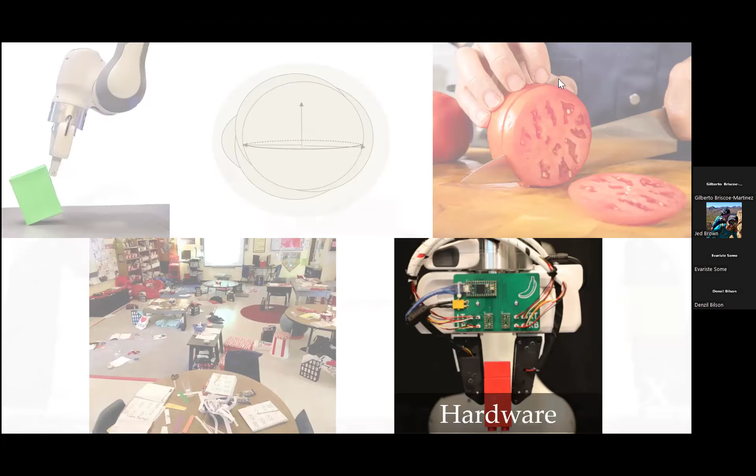There's also a last set of robot videos I want to show off. This is a collaboration with Daniela Rus's group, some students in her group. Here we built a robot hand that has two sets of conveyor belts in each of its fingers, and by running the conveyor belts in different directions, you can roll, pitch, or translate the object in hand.

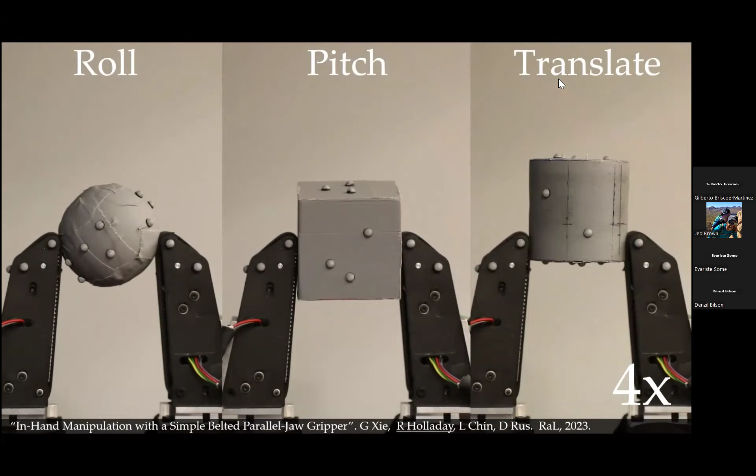We integrated this into that same task and motion planning framework in the context of installing a light bulb. Here, because of the packaging, we can only grasp the light bulb from the foot. So once we've grasped it, we re-grasp the object in hand by planning a series of belt motions to move the object, and then once we've done that, we need to install the light bulb within the socket.

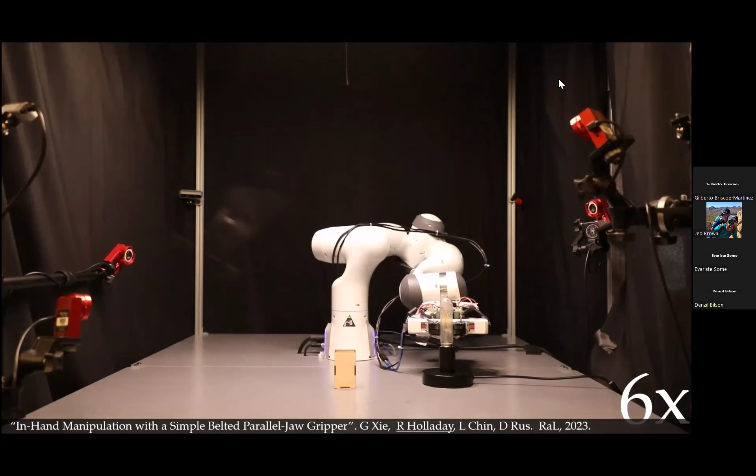Ordinarily this would be a complex set of repeated motions, like I mentioned for cutting. But we have conveyor belts for fingers, so this is super easy. We just keep running our conveyor belts. I promise they're running, even though it's a transparent object. You just sit around until... in this case, we had this cool piece.

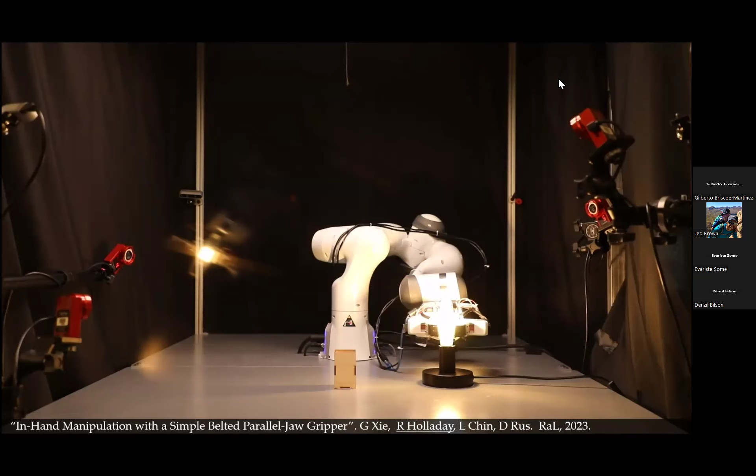Within the context of a task motion planning framework, we added two actions and their corresponding samplers. So there are questions of, whenever anyone shows me cool hardware, I think about how can I characterize it and integrate it within the context of this framework. It also has to be said, I think this shows off why collaboration is a great idea.

So summarizing everything up, I want my robots to be able to accomplish long horizon manipulation tasks. Think about the chores in your home and in your workspace. In order to accomplish these tasks, I think robots need to reason over geometry and physics. You have to consider the full richness of the world, what I'd say is the marvelous messiness and mechanics of manipulation. To me, work at this intersection is understudied but critical, and so it's a set of problems that I want to advocate for and solve.

And in solving them, I typically propose models and algorithms that put the onus on the robot to do the reasoning, because to me that's what's required in order to get robots to generalize. And at the end of the day, I want my robots operating everywhere. With that, happy to take more questions. Thank you.

With respect to the optimization component, here we looked at optimization in the context of optimizing for robustness. Because I want my robots to actually work in the real world, that's perhaps more important than making them go faster or doing the shortest number of actions. But to be entirely frank, for a lot of these problems, satisficing is already so hard that optimizing is kind of another level. Also, if you're doing multi-step manipulation, what it means to be optimal is sometimes an unclear question. But within this, a lot of the subplanners I was showing are sample-based. You can easily integrate making your subplanners optimizers, and we've done that in the context of task motion planning. Then you might have individual components that themselves are optimized, even if the entire thing is not. So I don't know if that fully answers a couple different pieces.

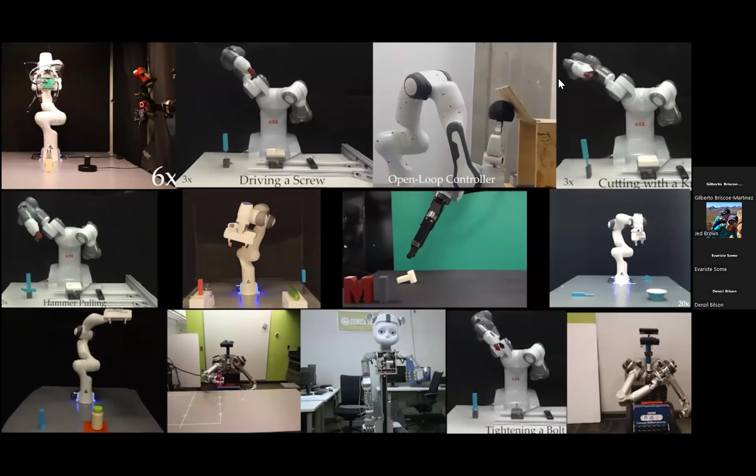Again, that has the limitation that it requires that you have a certain amount of privileged information. And so moving forward, there can be questions about how we get away from that. Although I do believe if you have enough information, using those models is really powerful because they're so compact and well characterized, and they do actually well characterize the world.

But yeah, we do assume privileged information in that case. For some of the dynamic manipulation that I'm doing currently, but only briefly hinted towards, we are thinking about using simulators only because good analytical models do not exist.

Yeah, up top. Nope, you. Hi.

Great talk. So how difficult is it to provide some sort of safety guarantees with these models, and also from the point of view of transparency within these models? Yeah, so those are excellent questions, and I'll touch upon them. I think safety is a really interesting question. I assume you mean if a human is operating alongside? Yeah, or even just guarantee of completion.

Yeah, there's no guarantee for these planners, they kind of inherit the guarantees of their subplanners. So for a lot of these things, you have probabilistic completeness. So whether that's satisfying to you or not is a deeper question. But whether you have safety with respect to people, that's not currently integrated. And I think there is a question of how we can develop safe things.

With respect to transparency, you do get the benefit of knowing what the action sequences are. You will not necessarily know why the robot came up with that action sequence, if you want to understand why that is the way it did. But because you have specified all of the actions, I think you do have a better understanding of how the constraints are being satisfied. So that's kind of hinting towards it, but I think there are questions there.